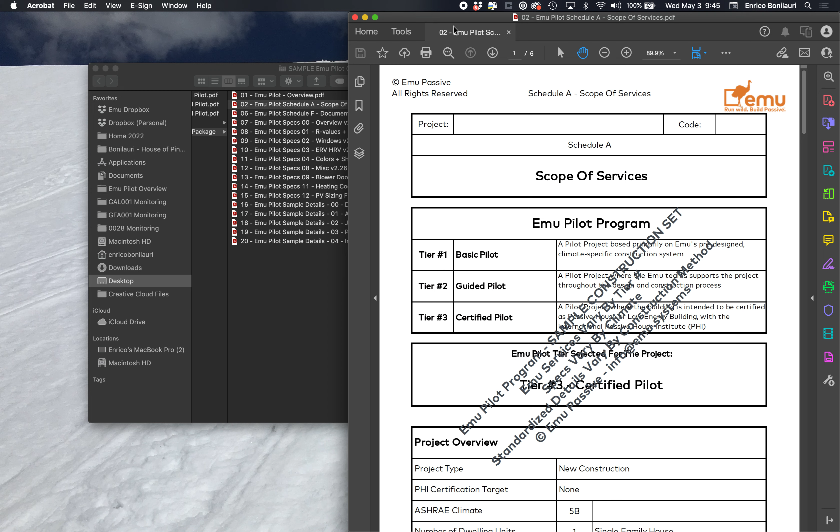Specifically, we have 3 tiers in the pilot. Starting from the top, tier 3 is the most complete one, which includes project certification, either as a PHI passive house or a PHI low energy building. Guided is a service where we do all the things that we provide as tier 3 minus the certification.

So these two, guided and certified pilot, we at Emu provide the architect and the builder with standardized construction details for the building envelope, the specs associated with meeting passive house in terms of insulation, air barrier, ERV or HRV fresh air system, the blower door test, all of those requirements, as well as for tier 2 and 3, we support the design team through design and construction of the project.

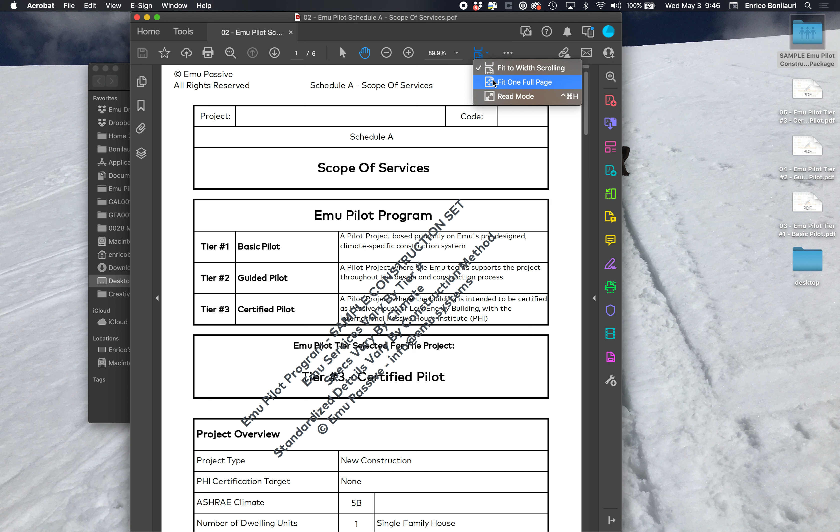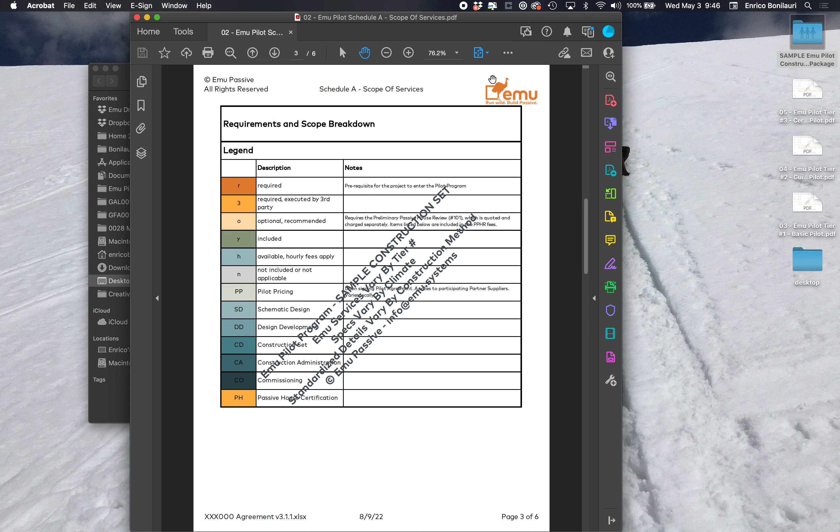And that breakdown is shown in this page. Down here, you will see what is required, what is optional but recommended, what is included, and what is not included. So you see here, for example, as a prerequisite for the training, the Boost; what we used to call the preliminary passive house review is now called the Emu Boost. And so for tier 3 is where you're going to see what is included in this column. Tier 2, you're going to see what is included in this column in the middle.

And tier 1 is really something meant for builders that have already done a couple of passive projects, and they're just looking for construction details and specs, but they're not looking for guidance as much as they needed in their first project. So tier 1 is more for returning builders that have acquired quite a bit of experience through the first or second completed passive project, and so they don't need the full guided pilot, and they're not interested in certifying.

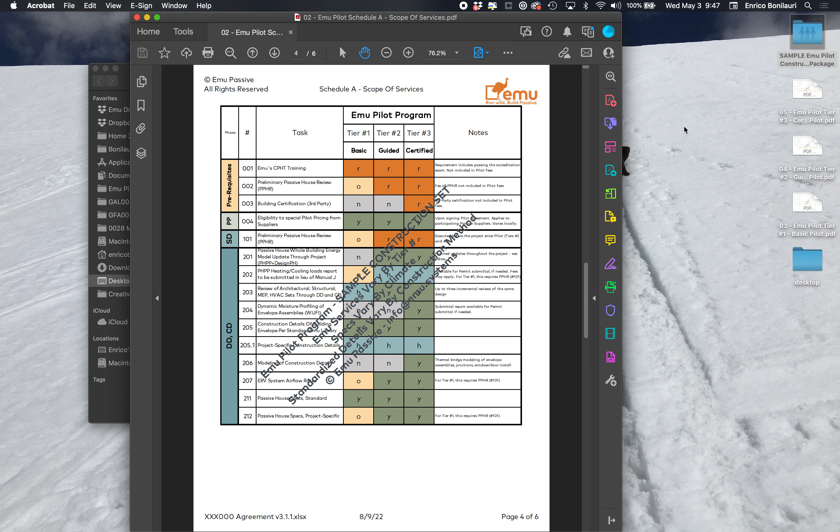And you can see here the breakdown. Again, have a look at this PDF because it's very detailed, and this explains what we provide at the different tiers. Now, the typical workflow, we have flow charts. I'm taking the one for the passive house, the certified pilot.

Then if it does make sense for the project to pursue certification, or if the client or builder requires that guidance through the process, or if it makes sense for us to be the ones to provide construction details for a project, then the project becomes a pilot. So the pilot is always step 2, which follows step 1, that is always the Boost.

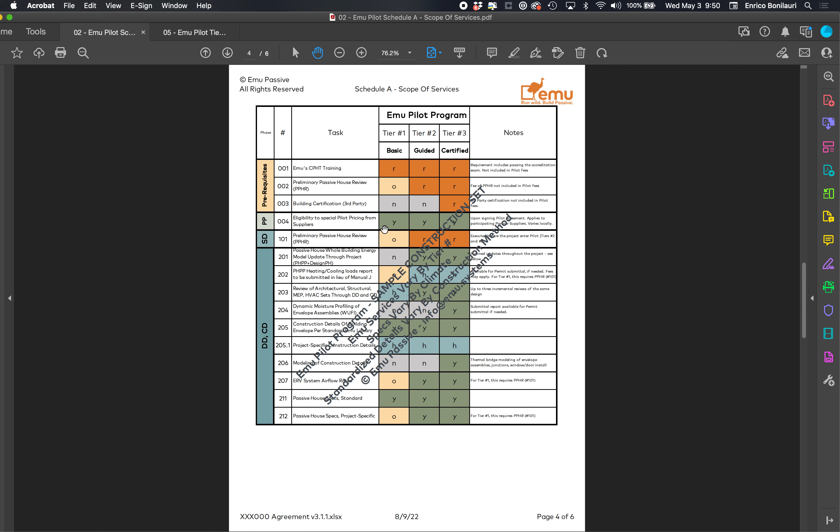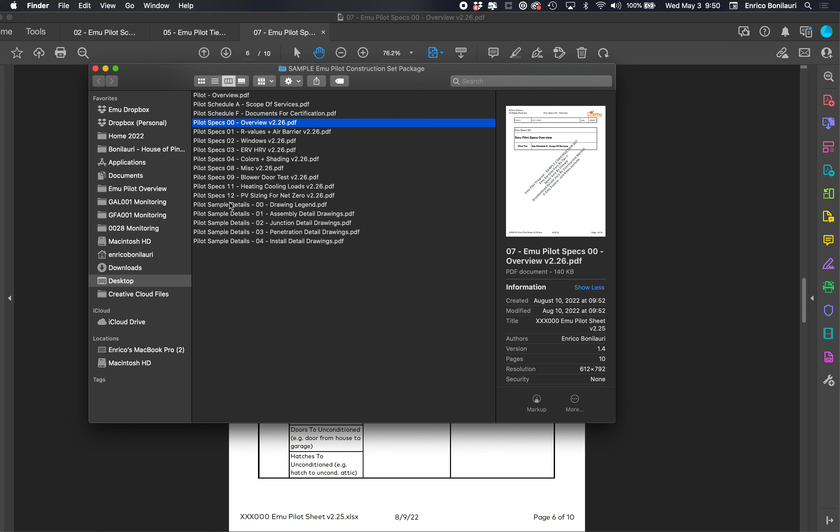Now, from the same folder, you can then see some examples of details and specs that we provide as part of the pilot. For example, this is an overview of all the specs that we provide. So this is something that makes it easy to navigate. We really take the lead on drawings and specs for the passive house envelope. So in other words, it takes on some of the scope that is typically allocated to the architect.

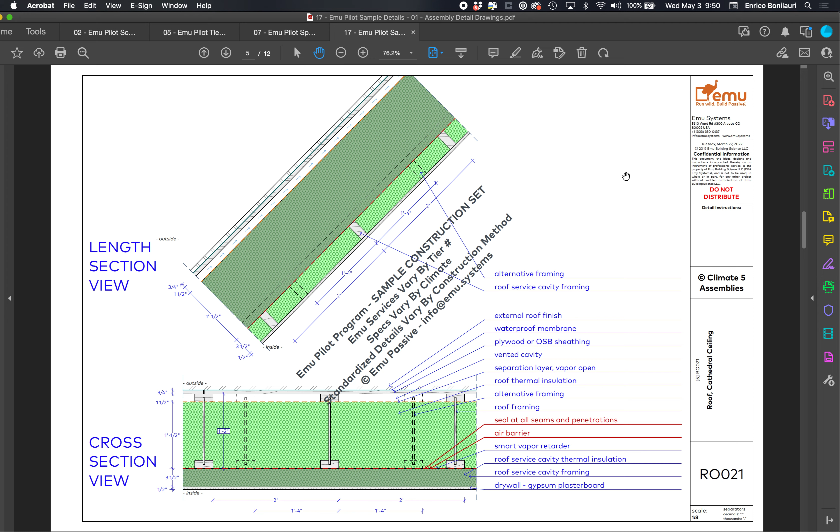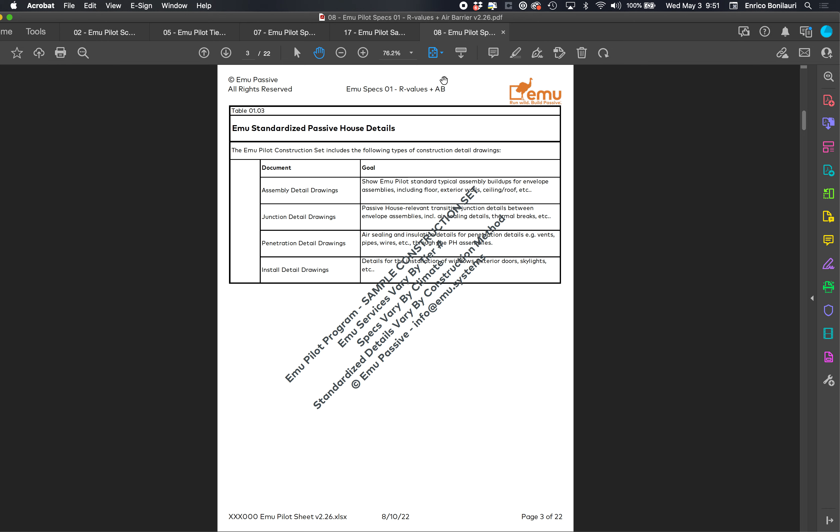and then we jump into the specs for the individual products to have for each individual layer of the assembly, so that this can be utilized by the builder, and this replaces the specs that an architect typically has in their drawing set.

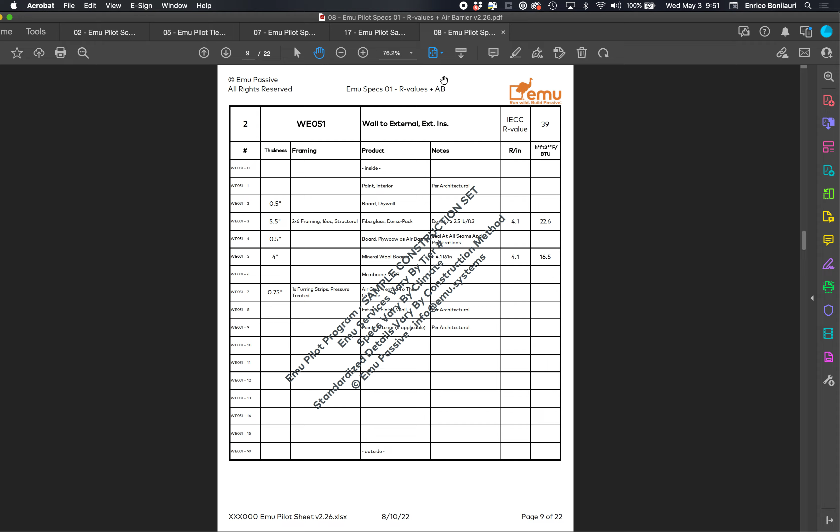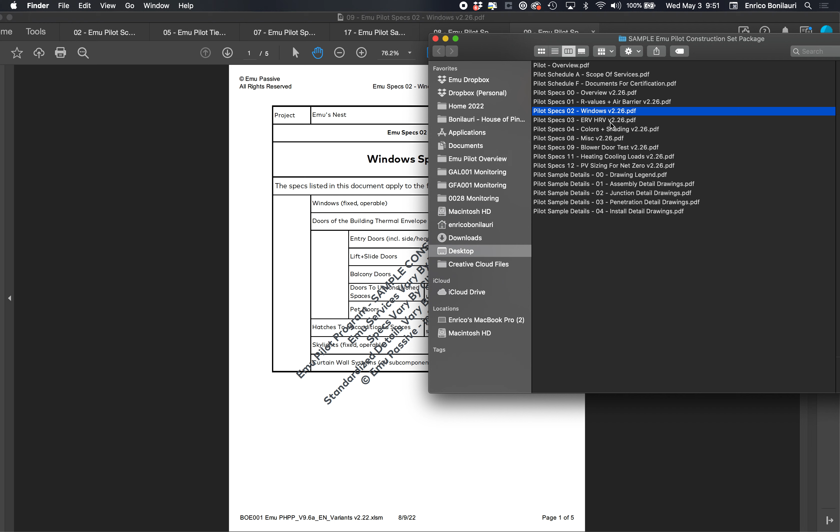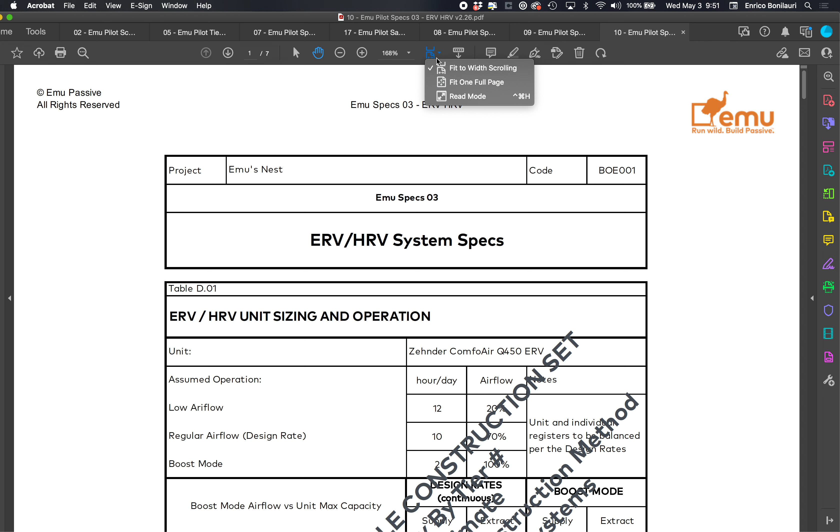More on the specs that we provide, the windows specs and the ERV specs are consistent with what we issue in step 1. Step 1 is always the boost, always what we used to call the preliminary passive house review, PPHR. And so in getting into the pilot, we just keep on updating the requirements and the specs for the project for windows and doors.

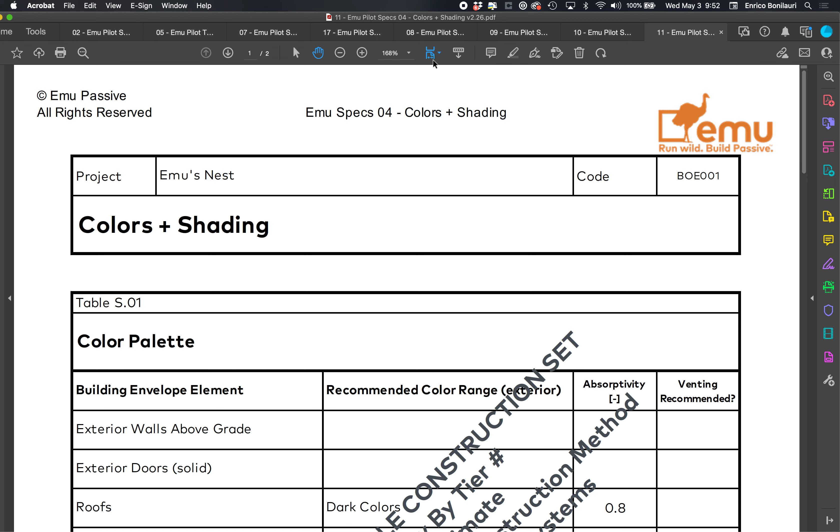Now, if a project is in a hot climate, we provide specs for colors and shading because that becomes also important to control overheating in the summertime. So this is something that we provide as part of the pilot in those climate zones where this becomes relevant.

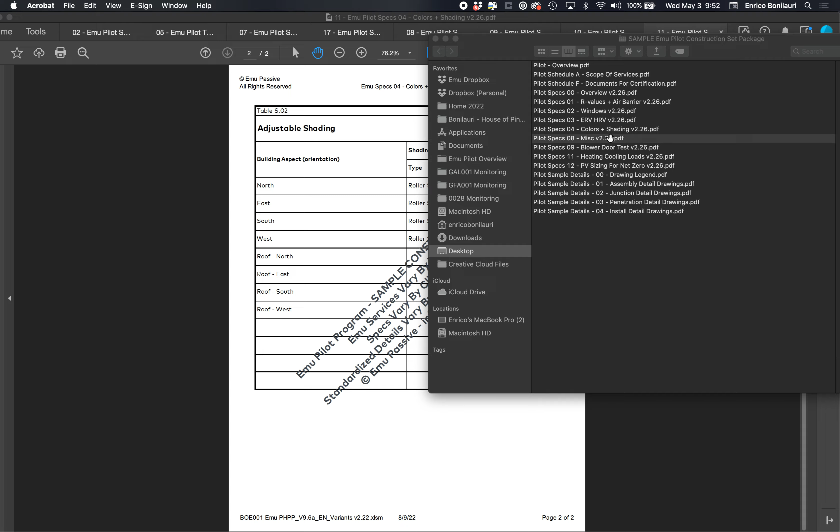Other miscellaneous, this is something that we actually keep on growing. We have specific specs for the electrician, for the plumber, for the HVAC installer, all details that have come up in 5+ years of doing pilots, and this helps a lot with providing off-the-shelf solutions to meet passive house.

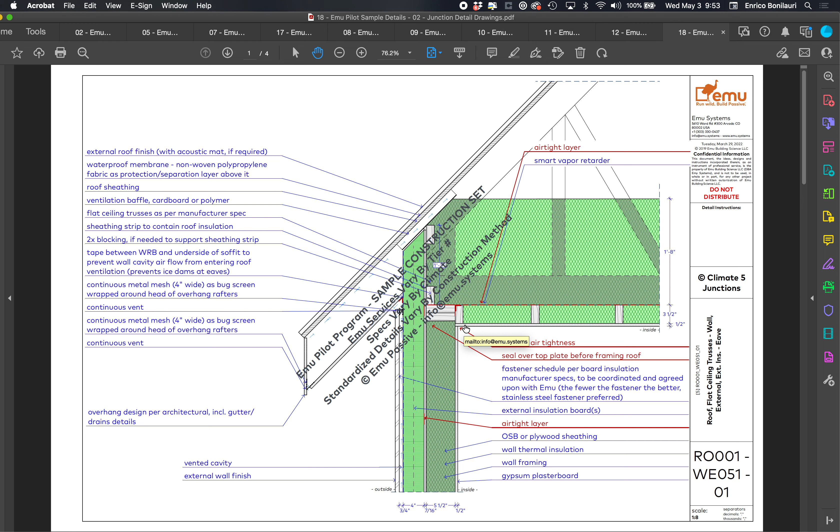So just to give some more information here, looking at junction details, for example, you see that we are very thorough in the details that we provide, and we provide a lot of instructions in terms of do this before you do that, in terms of sequencing, because in our experience that becomes the bigger part of having a successful passive house project and meeting very airtight building envelopes. So have a look at this, and please let me know if you have any questions about that.

But this summarizes what we provide in terms of the pilot, because we found this to be a very streamlined way for projects to meet passive house without having to reinvent the wheel every single time.